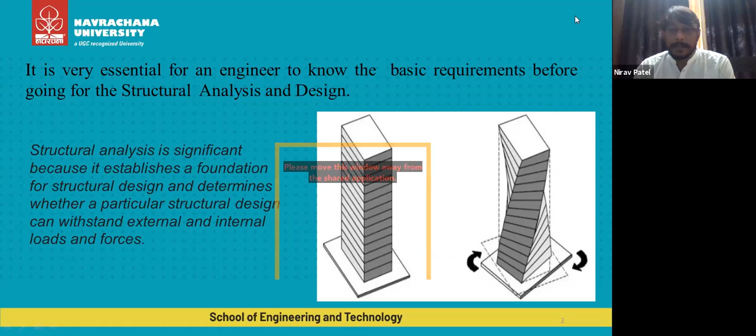Here on the screen, you can see a simple figure of a building showing the twisting due to unbalanced forces and how it is going to behave. Just a schematic diagram is being shown.

So ultimately, what do we mean by analysis? The behavior of a structure is going to function according to the design period for its intended use. It's not that we think upon any specific building for a specific period only - each building has a specific design period, different purpose, and different materials, which we'll see later. But we have to analyze that particular building for that particular behavior.

All structures are ultimately assumed to be linearly elastic, and based on that we calculate whether internal forces are produced due to the design loads. We can also say that material strength is always assumed - we predict the strength of a material, say steel or concrete, and those strengths are predicted and characteristics determined based on that, and then we proceed to the design part.

We've heard of the words bending moment, shear force, deformation, torsion, deflection. All of these are ultimately computed so we can analyze the particular building, and based on these values - which are our analysis values - we design according to the loads and governing forces.

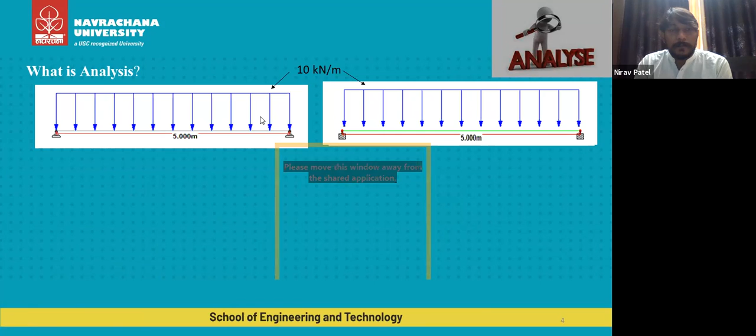Here a brief example is given which most people might already know, just to brush up. A simply supported beam is shown, having both supports as hinges. A 5 meter span is taken with a UDL of 10 kilonewton per meter. The first beam shown is a hinge beam, and here this is a fixed beam. So for the same span and same loading, what changes can we see?

This can obviously be calculated manually, but I've taken a screenshot from STAAD itself. The maximum deformation in case of a hinge beam with simply supported condition is 2.133, while in case of a fixed beam with the same span and loading, it reduces drastically to 0.417 - almost 5 times. We've heard that when the support changes from simply supported to fixed, we can reduce the deformation up to 5 times.

If I focus on the bending moment parameters, here the maximum bending moment produced due to the simply supported beam - we all know the equation WL square by 8 - gives a value of 31.25. The same thing in a fixed beam is distributed to a fixed moment as well as the simply supported moment at center, coming to 20 and 10 respectively, which reduces to one third the extent of reinforcement ultimately provided at the center.

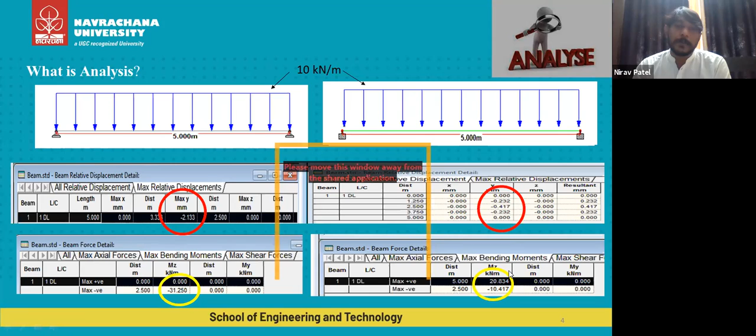So all of this is analysis. Now what is design ultimately? We're going to talk about analysis, so why should we focus on design? Design is a parallel thing which should be known while analyzing the structure - we should know both parameters. Only one is not going to help out on its own.

So when we want to fix a section size - say for example a concrete section - whether it is 250 by 400 mm beam, or 200 by 400 or 500 mm.

What section size I should take is again going to be determined by the characteristic strength of the material, whether I'm going for M25 grade of concrete or M20 grade. The whole beam size is going to change accordingly.

We want ultimately the beam, column, or any structural element to sustain the bending moment, shear force, torsion, as well as deflection, which is analyzed due to the design loads we assume while designing the whole building. As the code has given permissible limits, we have to check them within those permissible limits.

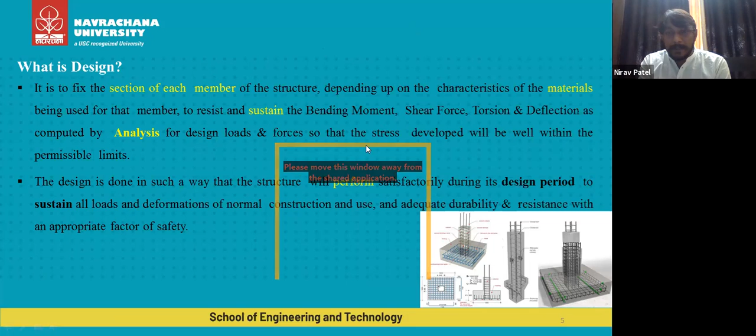The design period of any particular structure is to be done till a certain point, and it has to sustain all the loads and deformation under normal conditions. Normal conditions means whatever we have assumed while designing, and that same thing should be done parallelly throughout the lifespan of that structure. Say if I'm designing a beam for 10 years, that same thing should be done parallelly.

The basic requirements for structural analysis: it should be designed according to the type of structure, the purpose of use, and accordingly we have to analyze the particular structure. Whether the building is residential or commercial, whether it is a road of flexible or rigid pavement, whether it is a bridge of minor or major category, whether residential, commercial, educational, industrial, or tall buildings.

You might be thinking, what is the purpose, how does it influence analysis? The purpose or use of the structure is important in analysis, because we have to take a parameter based on the use of the building also. That we are going to discuss further on.

The materials to be used for the structure are steel, wood, fibre, plastic. Any members or materials can be used, and it is to be accordingly modeled or analyzed for our particular structure. Then an important parameter is the location of the structure, where it is there.

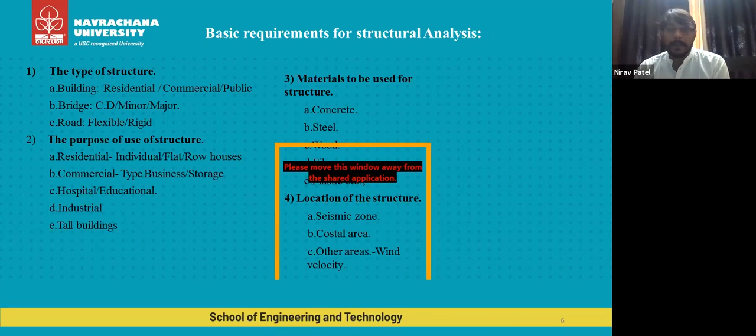The seismic zone, as we all know, depends on which country and region we lie in, and it is going to affect how we analyze the building. Not only seismic zone but coastal area, the wind parameter, wind velocity adjusting to the building, and the height of the building - all these parameters are to be considered.

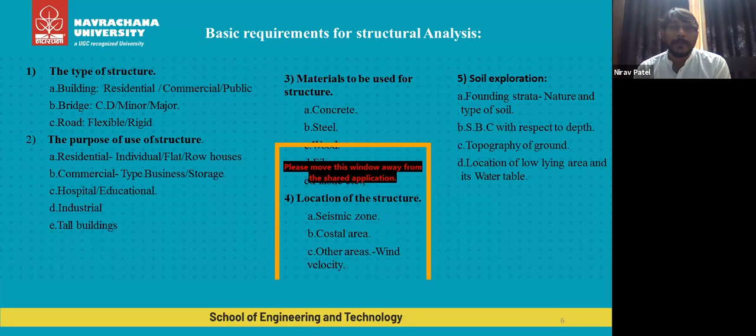Soil explorations are also important, which has already been discussed. Yesterday we had a very nice presentation on soil importance and its uses, how SBC is important, and whether it is lying on a low lying area, whether the water table is impacting it or not. These parameters also are to be considered while analyzing any structure.

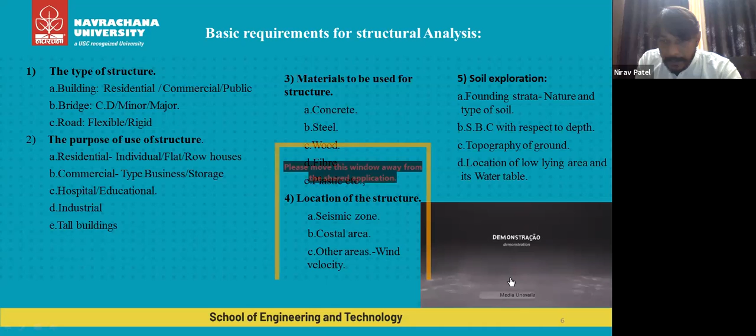Here I have a very short video to be shown. It is focusing on structural connections, and how connections are important and what they govern. Please excuse me for a minute, I'll just play the video. I guess it's not playing here.

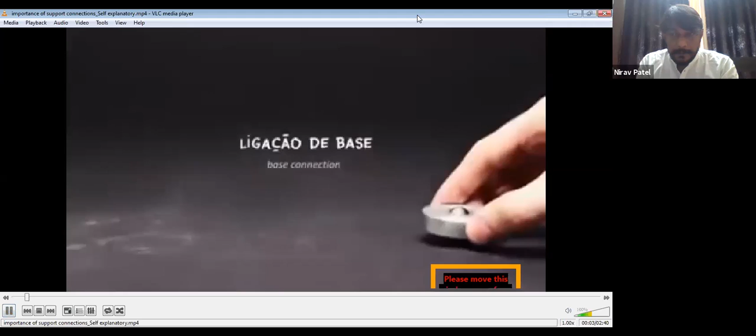I hope the screen is visible. Yes, yeah, I'll just play the video, just a bit. Probably many of you have seen this video, but still for a regular glimpse of how it impacts, a very visual thing is being shown to us.

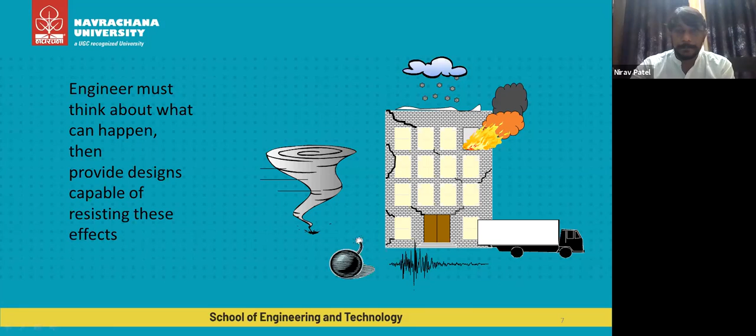Pertaining to wind loads, a very famous example from 1889 which is still standing is the Eiffel Tower, which we know is 300 meters tall, designed and analyzed by Gustave Eiffel in such a great manner that it is still withstanding all the forces, even though there were no softwares available through which we could analyze at that time.

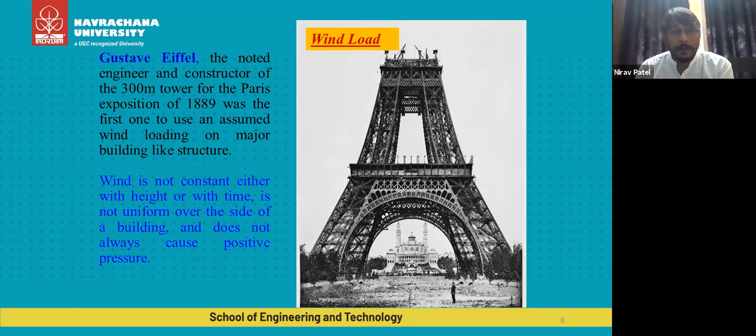As we know, wind is not constant with height nor is it constant with time. Right now there may be very less wind, and after some time there may be high intensity wind flowing at 40-50 meters per second, and so on. Also, it is possible that on one side, the windward side, it creates high pressure, and on the other side it creates low pressure. So that was also to be considered during these points.

The second important parameter which I feel is important is the seismic load. Now for the seismic load, if we see, pertaining to our own country, these are the zones highlighted, and we can see majority of the land. The percentage has been calculated, and it is almost 60% of land under moderate to severe seismic hazard.

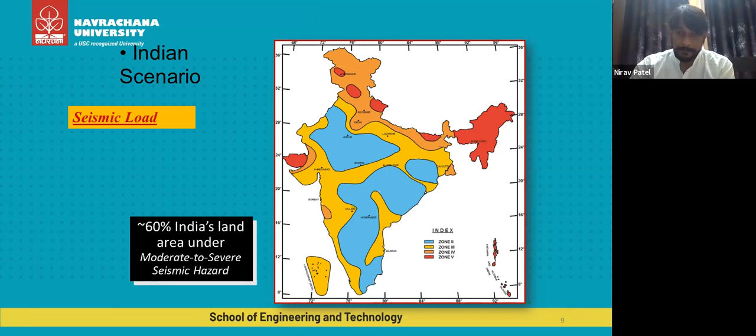If you look at the four major cities, Delhi, Mumbai, Kolkata and Chennai, they lie either in zone 4 or zone 3. The major cities are listed: Patna, Darjeeling, Amritsar, Ahmedabad, Surat, and our own cities in Gujarat - Gandhinagar, Rajkot, Surat, Vadodara - all are in zone 3, so they are more critical.

Bhuj, as everybody knows, is in zone 5. So that is one of the major segments where we are usually worried about what is going to happen to our nearby cities due to Bhuj.

Now we are going to directly focus on earthquake as a parameter, and why we are going to talk about it, because whatever structure of any height we consider, earthquake has to be considered for that building, whether it is a 4-story or 5-story building. Nowadays we must mandatorily consider that earthquake force and analyze a particular building. To be very precise, even if I design a single story building, I still have to consider where it is located and how it is going to impact due to the natural hazards.

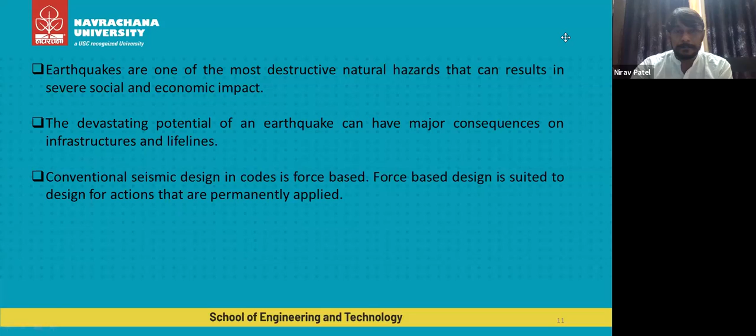The conventional design code which we usually refer to, IS 1893, is a force-based design code. Now, force-based design is suited to design things which are permanently applied to a particular structure. There are two types of methods we can deal with: force-based method and performance-based method. The force-based method is the one which usually governs us, and we design our buildings according to that.

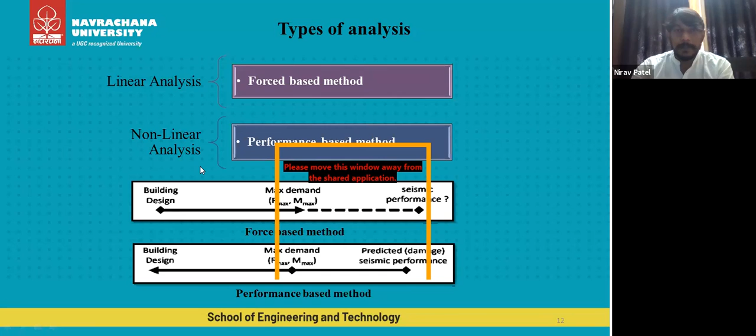Second is the linear but dynamic analysis, that is response spectrum analysis. Then moving on to non-linear cases, the first is non-linear static analysis, that is pushover analysis, and non-linear dynamic analysis, which is time history analysis. Now when we go for different types of analysis, how it is to be considered, we'll see briefly, and then move on to one particular method in depth.

Firstly, for time history analysis, how it is governed - the name itself says time history analysis. We have to analyze any particular building, any particular model, any particular structure based on the historical data which we are having, which is based on time.

We have to take a particular earthquake data which is already existing. Say for example, I want to analyze my particular building which I am designing right now to resist the earthquake which had come in Bhuj, so I will take that time history. If I want to analyze my building up to the extent that it can withstand the Kobe earthquake of so and so intensity, we take that data which is already available from the past. That's why the name is time history analysis.

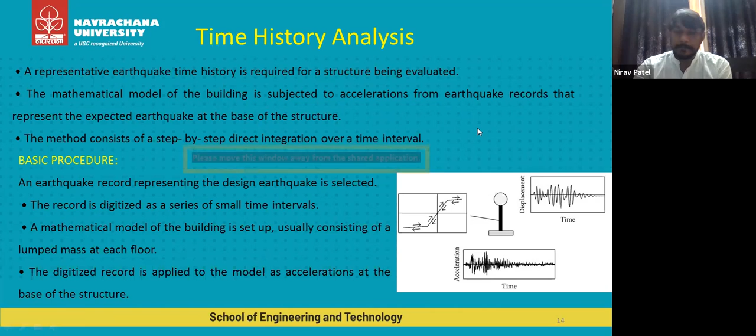Now comes the equivalent static method, which is a very interesting case, I would say, because in the majority of cases we deal with this - whether we want to even go for a hand calculation, this is the method which is used.

Importance factor - whether our building is a residential building, commercial building, or a public building like a hospital building, importance should be given. So that role plays over here, that the importance factor of that particular building should be 1 or 1.5. We all know that our building during an earthquake is going to be subjected to some or other harm, but we do not want public buildings, hospitals, or fire brigade stations to get damaged at any point in time, because they are the sources where casualties are going to be taken, or they are the buildings from where we can save other structures.

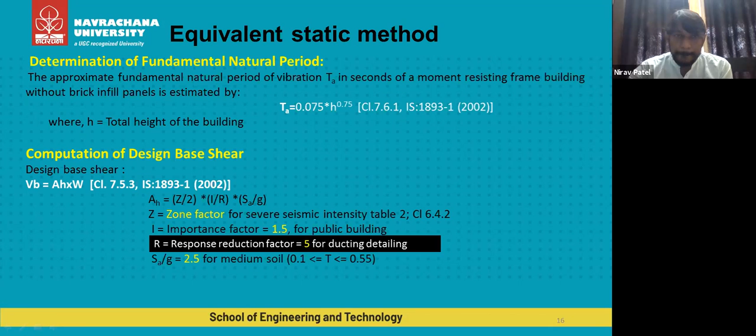Now, how is that particular factor decided, or how the code is giving that particular factor? That we are going to discuss today. So firstly, before discussing the breakout of the R value, we'll see what other codal provisions are taking for the value of R. We have said that Indian code takes 3 or 5. What do other countries take? Let's have a glimpse of that.

So if you compare with Europe, Japan, and Mexico, the R factor is based on the time period. When we have a time period of 0.1 seconds, it is taken as 2.3, 3.3, and 2.5 respectively for the respective countries. And when the time period increases, the R factor also increases to 5, 4, and 4. So this is being governed by these countries. Looking further...

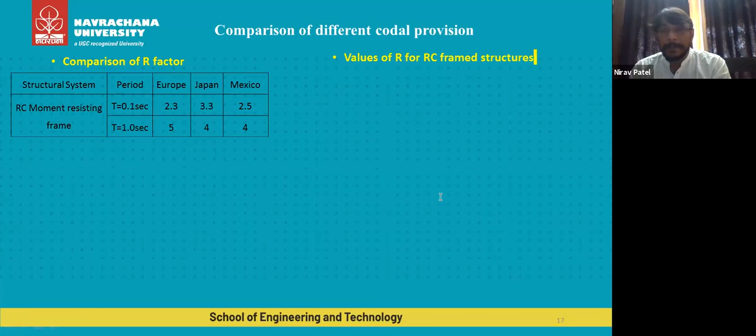I don't know why that is not being displayed. Okay, just for a minute, we'll see from this slide itself that the ductility factor which other codes are governing, that is ASCE 7, is also giving a variation of 3, 5, and 8 depending on the dissipation energy - how it is going to dissipate, whether it is low dissipating, medium dissipating, or high dissipating. So based on that, the code is analyzing the structures.

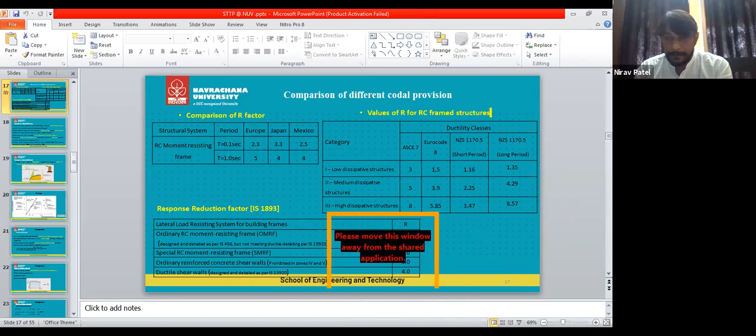Now, as we have seen, according to the Indian code it is clearly visible that Z, I, SA by G is based on the seismic hazard estimation. Wherever your building is, suppose it is in Vadodara city, we have to take the value of Z as the third zone. Whether your building is of normal importance, a residential building, you have to take I as 1.0. SA by G value we have to take according to the time period. So there is no other factor which is focusing on the structural aspect of the particular building.

So the R value is going to be included in our design, and that's why we divide by the factor R and reduce to that extent, because we want to dissipate the energy through inelastic behavior. So the R factor ultimately acts as a linkage between the elastic level and the design level, and it also provides a link between the linear and non-linear behavior.

So we all know the behavior of any particular building according to the material which we are selecting, whether it is structural steel or reinforced concrete. The R value works according to that. So it is also an essential tool where inelastic behavior plays a role when an earthquake happens. So we are going to reduce our force to that extent so we can allow our building to perform well during such cases.

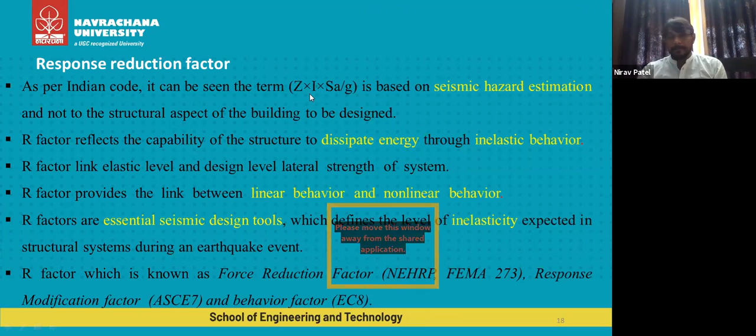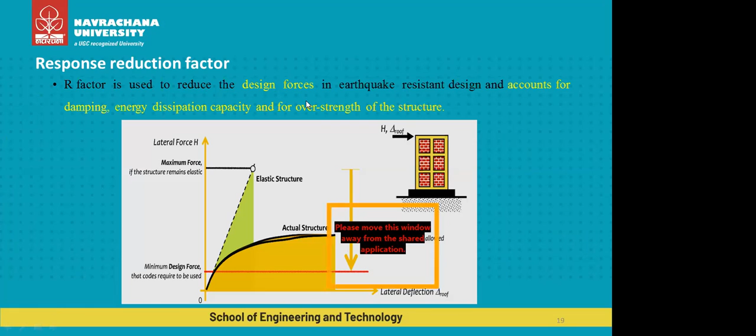So what does it ultimately do? It reduces the design force to an overstrength factor. When we design according to seismic codes, it is going to reduce to that extent, and account for damping, energy dissipation, and overstrength factor. These terminologies are very important, and based on that it gives the value. But the breakup is not given in the Indian code, they have directly given us the values.

Here a pictorial view is shown, with lateral forces and lateral displacement. So what happens due to earthquake? We know a building is going to move and laterally displace. So here we can see the elastic behavior of the structure, which converges from elastic to non-elastic, or we can say this is the actual response of the structure. We have to design the force according to it and reduce it, so the building should not reach up to this level, but should be reduced to this level. That's why we are reducing that factor. There's another view also, which I'll show.

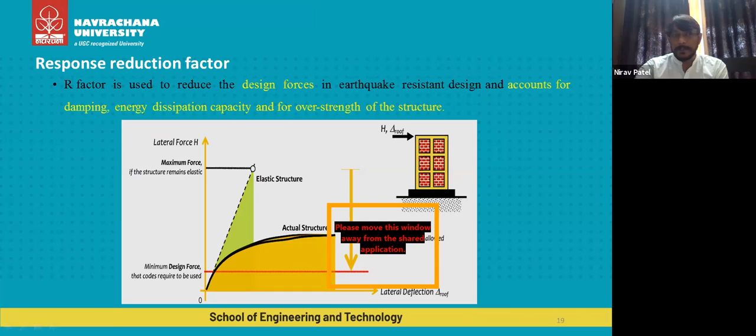So these are the terminologies I was sharing with you. The maximum force, if you see, overstrength factor, whether we call it redundancy factor or ductility factor, these are the three major factors based on which our R value is divided. So R is the multiplication, or the product, of all these three factors: the ductility factor, redundancy factor, and overstrength factor. We are going to see each of them one by one simultaneously.

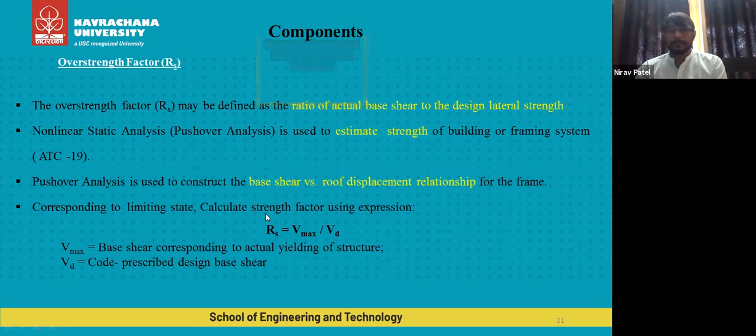Second factor is the ductility reduction factor, denoted by R mu, which is the ratio of the maximum deformation to the yielding deformation. The first parameter was mainly focusing on the base shear. Now, the second parameter is focusing on the yielding of any building, and based on that, the factor can be determined.

Now, there is no code which prescribes this particular parameter. So according to the research available, two major researchers have given the values or equations to find out the ductility reduction factor: Newmark and Hall, two authors who have combinedly worked extensively in this area, and Miranda and Bertero, two researchers who have also worked and found out these equations.

So ultimately, from the pictorial view, ductility in normal sense is the maximum ratio we get upon the yielding ratio we get. That is the ductility of that particular member, structure, or element - how much maximum it can yield, how much maximum it can deform, and where the linear to non-linear stage starts.

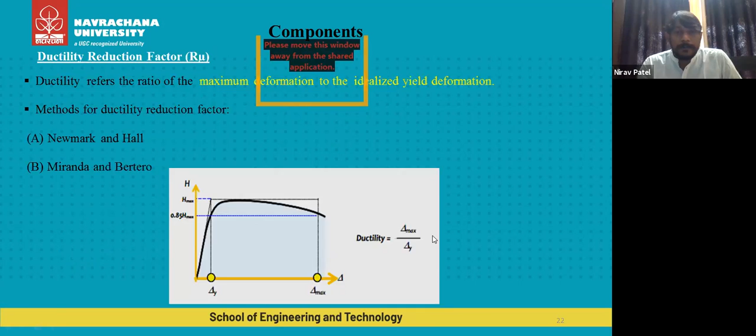So we have already seen how mu is calculated - this ductility is ultimately your mu, delta ultimate upon delta yielding, which we have already seen through the graph. This equation is given in ATC 19. Based on that, mu is calculated, and based on mu, R mu is computed. This equation is given by Newmark and Hall.

Second parameter focused on is by Miranda and Bertero. What they say is after almost a decade later, say 10 to 12 years back, they started developing equations based on soil values also, wanting to impact on that. So based on that they found out these equations, that R mu will be based on mu minus 1 upon phi, where phi is a factor which considers time period, ductility factor, and also the logarithm value of your time period.

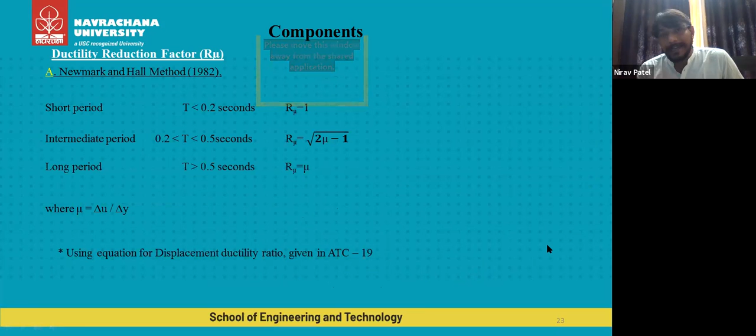Here, only one factor clearly states that when my time period is between, say for example, 0.2 to 0.5, I have to consider this particular equation - whether it is 0.2 or 0.5, I take the same value. But for an intermediate zone, whether it is 0.21 or 0.49, it would have a drastic change. So that lag was found out by these two researchers, and they have found out these equations.

Ultimately, the purpose is the same: to find out the ductility reduction factor.

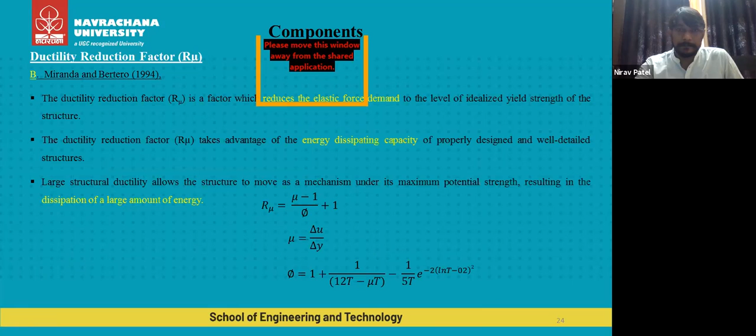The third factor is the redundancy factor. The redundancy factor is purely based on the structural system, how we are making that particular system. For example, whether it is a 2 bay frame, 3 bay frame, 4 bay frame, how many number of columns you are having in one line, in one orientation. Based on that, directly this value can be computed.

So for a non-redundant system, the failure would be equivalent to failure of the whole entire system. Say for example, if I only take a normal 2 bay frame and an earthquake happens, the redundancy factor is going to be a lesser value. When it is having more number of columns arranged, it provides stability, and that's why the redundancy is going to increase.

As provided in ATC 19, when the number of vertical lines of seismic framing, what I call bay, are 2 bays, you take the value as 0.71. When it is 3 bay, take it as 0.86, and 4 or more than 4, directly we take the value of 1. So when we have frames with 4 or more bay lines supporting the seismic frames, we go directly for one value. When it is a lesser value, it impacts the R factor, reducing that factor and ultimately increasing the capacity of our building to that extent.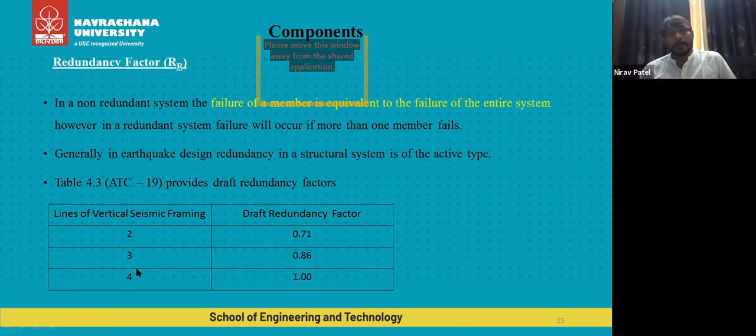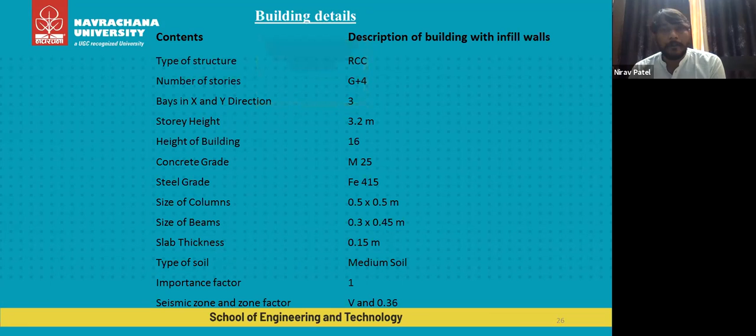Let's take an example to understand how effective it is to consider this, whether the code is giving us correct guidance. A very brief example is taken to understand the importance of the R factor, whether we should take the value directly or incorporate it, and on what basis it should be decided.

Only one example is shown here, a G+4 building, with only one story considered. This analysis can be extended to number of stories also, you can vary the number of stories. The soil type here is considered medium, we can change the soil type and conduct the same study. So even fixing the parameters, is it really impacting? Let's check that. Varying the parameter obviously is going to impact.

The importance factor considered is one. The concrete grade, as in RCC structure, is M25, which is usual nowadays. Fe415 is the grade of steel. Story height is 3.2, and the importance factor, as it's a general commercial building, we take as 1. The seismic zone is zone 5, focusing on the worst case, and the zone factor is considered accordingly as 0.36.

This frame is considered, for example, we have taken 3 bay. The frame's base size is taken as the same, 5 meters, and the height as 3.2, as explained to you.

Now the building model is analyzed using SAP as a tool for better, faster analysis, and we have considered 5 cases. Governing for only one case, I thought that would it help or not, so for that, 4 more cases are taken. The parameter, along with the video shared with you, had the connection as an important parameter, plus bracing was an important parameter.

Whenever we analyze any building, the main area to focus on is analysis. How we should analyze that building when considering all the loads is a very important parameter, and based on that the significance is decided. So we are going to signify not only the importance of the R factor but the importance of analyzing a building in that particular model.

Now analyzing the building means what? Any building we usually analyze in software, whether SAP, ETABS, StaadPro, or others - we draw the frame, analyze it, give the dead load and live loads accordingly, and place the wall loads as a UDL on the wall. Obviously the loading part is perfectly analyzed, and there's no harm in giving that loading, because that wall is actually going to be there on the building.

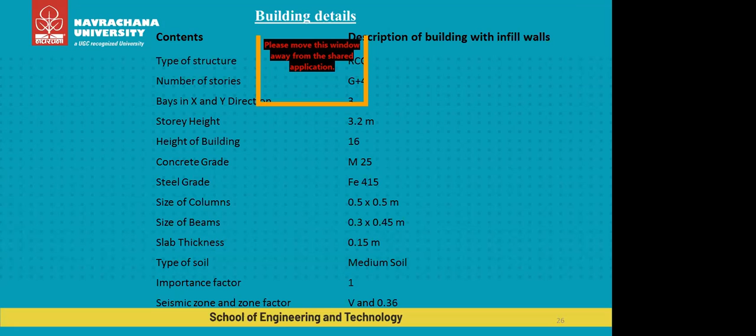If I have a G+5 building, and parking at the ground floor, with first floor, second floor as normal floors, what is going to happen? Usually, which floor fails first? If anybody could draw out the attention... Don't know, sir, which one? Okay, you don't know. So if you see the photographs of any structure which has failed during an earthquake, you will usually find the ground story, the parking story columns failing, and so the whole building collapses.

Correct or not? Yes, it will collapse from the base. So that base is a weak story. We usually technically call it a weak story.

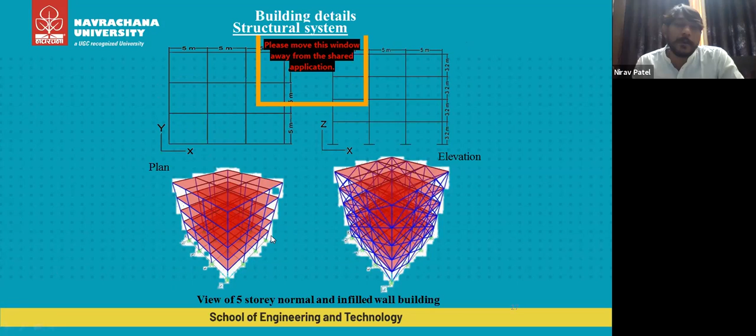Why is it a weak story? Because in the building frames we are considering, everywhere we have a wall, but this ground story is not supporting any masonry wall which the other floors usually support. Due to this behavior, all other floors have more strength, and this one is the weak one. That's why we technically call it a weak story, and due to that it fails, and if this fails, logically the whole building collapses.

So that parameter is very important, whether that particular parameter is incorporated into our model or not. When you are not incorporating it and then you provide it, actually you are safer. As a designer, we need not worry if we don't consider that wall as an element and don't design for it - if we don't consider it, we are safer. But why not take the advantage during the analysis part? So that is also being focused on in this particular example.

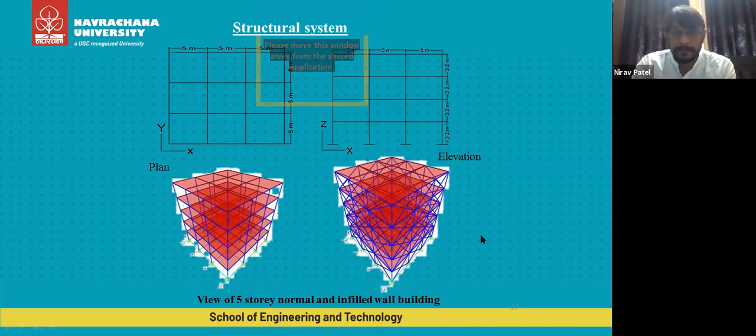Five cases have been taken with infill walls. One is going to be a bare frame - meaning I am not considering any wall element, and I'm going to run it normally without any masonry infill wall. Second, I'm going to take a building with all masonry infill walls. In another, I'm going to take infill only at the periphery. Two more models I'm going to consider as weak story cases - in one, I'll remove the infill from the lower portion, and in another, I'll remove it at the middle story. So let's understand that behavior, how it acts according to the analysis.

The design part is obviously about determining the dimensions of any particular element, whether it is beam, column, or slab. But how to analyze it, whether we should consider this or not, and if we are considering it, what are the pros and cons, we are going to see in this particular example. Over and above, we are also going to compute the R value, the R factor, which is directly given as phi in our Indian codes.

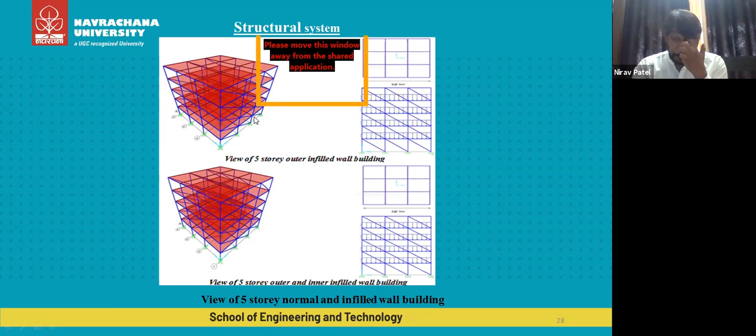Now, as I've said, the infill wall is a very important element that has to be computed and assigned to the building. To compute that, again, research has been done. It is not given in earlier versions, but in the 2016 version, it is now being incorporated. Up till now it was not there. So for the infill wall, now the equation is being given, but before that it was not there.

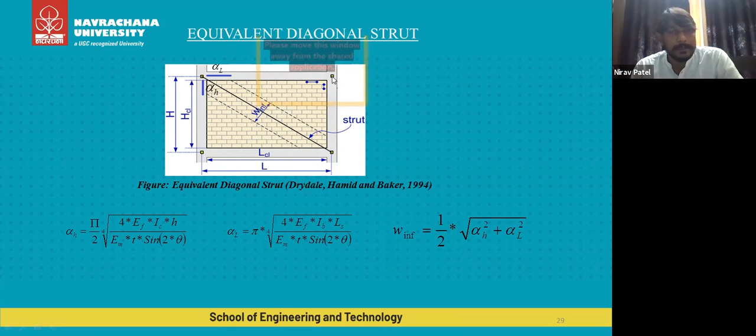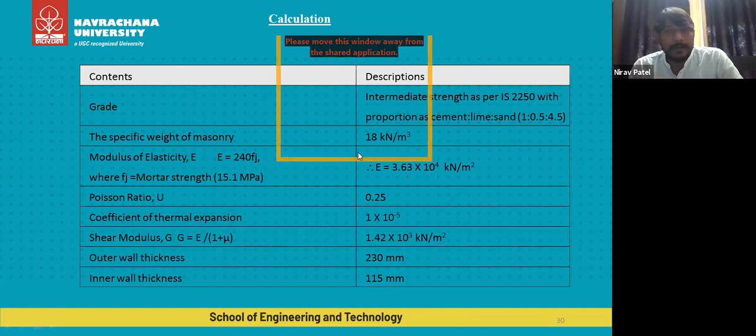So these are the components using which we can find out the width of the particular masonry strut element. The specific weight usually is considered as 18 kilonewton per meter cube. It may be considered 17 to 20, so I have taken 18.

The modulus of elasticity is given by this equation 240 Fj, where Fj is the mortar strength, since mortar is usually weaker than masonry or concrete. That is 15.1 megapascal, so the E value is computed in that sense. Poisson ratio is 0.25, and we are considering the coefficient of thermal expansion. The G value, we know this equation that G equals E upon 1 plus mu, so that also we have computed.

The outer thickness of the wall and inner thickness of the wall, which we have considered throughout the analysis, is 230 mm and 115 mm, because that is used practically. If we go on field, we see 9 inch walls, so converting 9 inches to mm, we get 230 mm.

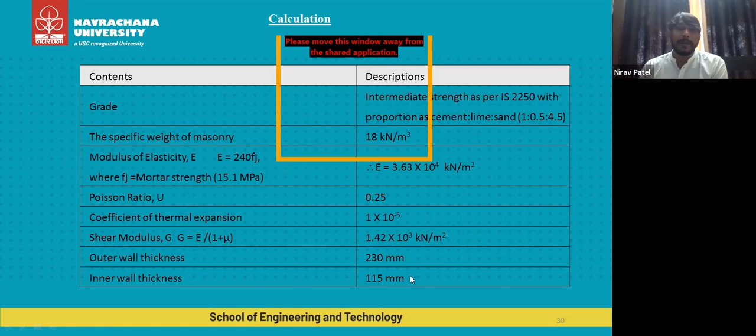The RC sections, if I precisely say the reinforced concrete sections which are governing, are taken as columns of 500 by 500 and beams of 300 by 500 mm size. The reinforcement of the column is 8 bars of 20 mm diameter, and 6 bars of 16 mm and 4 bars of 16 mm accordingly.

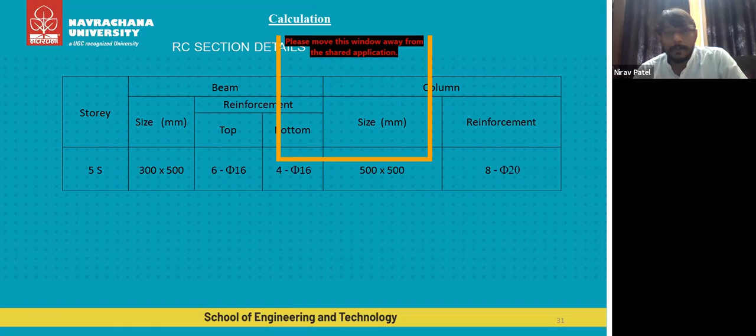Now how this size is governed, we can quickly see that the loading which we usually give on our structure, that is live load, can be considered as 3 or 4. The live load for the roofing is 1.5, floor finish we consider as 1, and the slab as 3.75 kN per meter square, considering 0.15 meter thickness.

So considering this load, firstly a preliminary size is to be governed. Even for analysis, we have to give the size of that particular element, and then we can run the analysis. It is not that this is a design part.

This is a preliminary design parameter which is required for analysis, because even while running the analysis we require how much dead load is going to come on the structure. This all is fixed, I agree with you all, that the live load is going to be there, but what is the size of the member? So what will be the member's own weight? How can we determine that particular weight?

So for determining that weight, we require the size of the member, and for that size, this is the preliminary design calculation which we have done.

So the dead load, as I said, 3.75, how it is there, that is just multiplying the density, which is 25 for RCC, getting the value. The total load is 8.75 kN per meter square. Factoring it, we get this value, and the total load is 196 kilonewton.

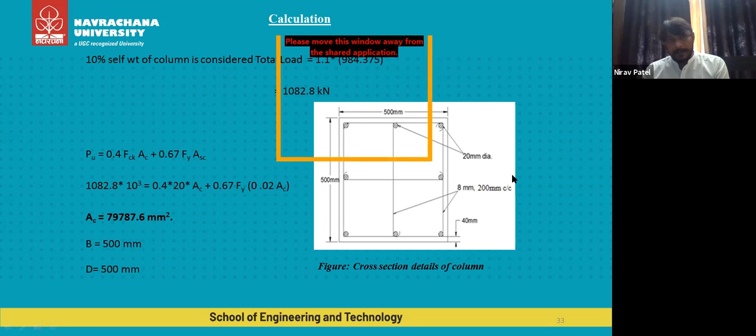I preliminarily decide the sizes based on the loading which is given to us, same way for the columns, same way for the beams. The span is there, the UDL is there, converting using the equation 0.138 FCK B D square which we all know, assuming the beam size, and then governing the size accordingly.

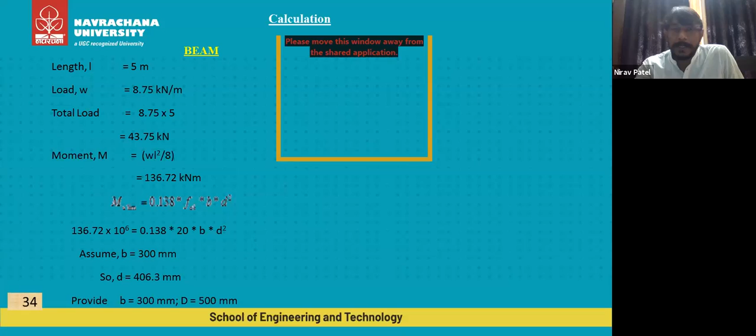So this is the procedure for how we can determine the preliminary size of the beams and columns, and how we can analyze a particular structure. Now even for finding out the base shear, we require the size of the member, so that's why everything is incorporated, and here the 5 cases which we have discussed are listed over here.

A normal building is one which is not having any walls. Second case is where infill wall is there, but only at the periphery, inner walls again are not being given any strut element. Then the third model, every wall is given as a strut.

The fourth, as we said, is weak story, and the fifth is soft story. Whenever the wall is not there on any intermediate story, that is considered as a soft story. Same way as we consider on ground floor, the parameter here is technically known as a soft story.

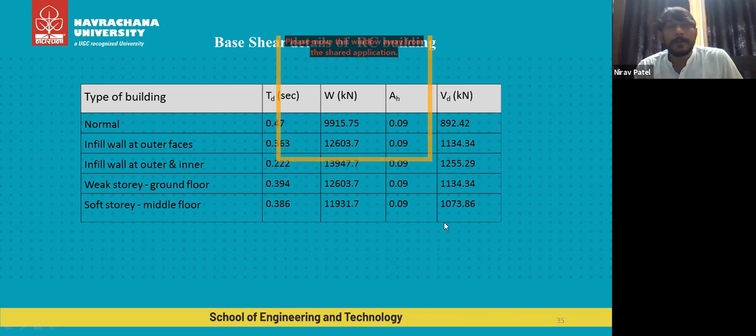The design is governing the particular elements, and based on that we are analyzing the weight of the structure, the time period, and finding out the base shear. This is the design base shear which we are getting through the equivalent static method as per the given codal provisions, that is IS 1893.

So the code part is over here. Now again we require the second base shear, which is the actual base shear. How can we get that? For that we need to run the pushover analysis.

The static pushover analysis is a relatively simpler intermediate solution to a complex problem, which is going to incorporate all the imposed load on the structure, because in pushover analysis we are going to push a particular structure up to a desired level.

Pushover analysis is a very basic and useful tool for non-linear static analysis, which is ultimately going to evaluate the limits up to which we can finally get the desired drift or the desired force in a particular segment. The analysis is going to be terminated or stopped at a target displacement.

That displacement is known to us at the starting only, and we are going to design the particular beam, or the column, or the whole structure to be precise, for that particular target displacement.

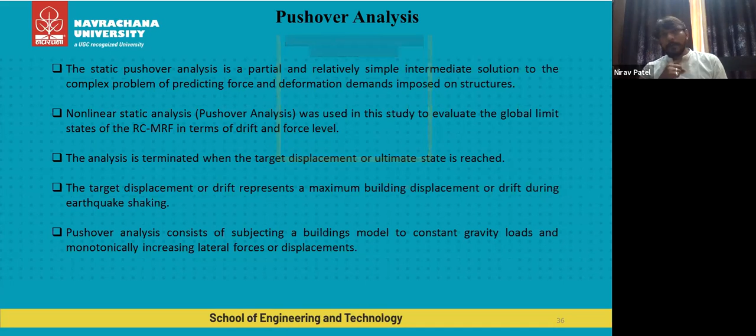What we usually do is, the loads actually acting on the building are known as gravity loads. So firstly the gravity loads are there, and then the monotonic load is going to be acting on the building in case of horizontal loads for your pushover analysis.

SAP is being used as a tool here to analyze the whole models. A brief set of screenshots are also being shared. If you want to use SAP as a tool, how you can do that, just for a ready reference I can say—I'm not going to go into the software part a lot, just a glimpse of that.

Firstly we are going to define the mass sources. The mass source is the whole building as a whole. Then we are going to define the different load cases, whether it is dead load, live load, then response spectrum load, or pushover analysis.

So we are going to determine the push, and then decide the acceleration, whether it is going to be considered into which segment, whether we are going for a linear case or a non-linear case, whether we want to include the P-delta effect or discard it. That again is a very different topic where we can undergo research and understand a lot of parameters.

Then we decide from which code we want to adopt. So we have used FEMA, and we are going to define the hinges as per the given table. We can also define as per our choice, but they are predefined as per FEMA here.

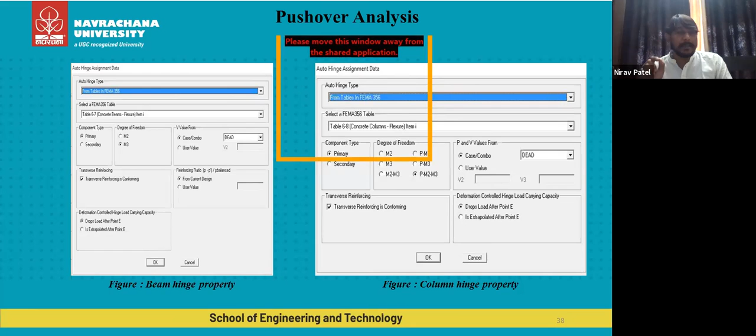So if you want to see this structure shown here, this is the beam hinges which we define, and this is the column hinges which we...

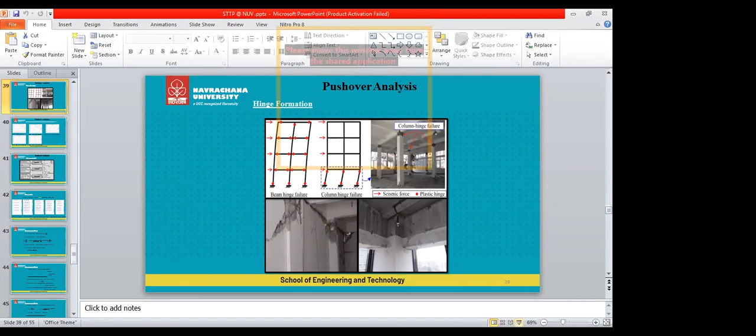I don't know, this is also harassing me today. The screen is not moving.

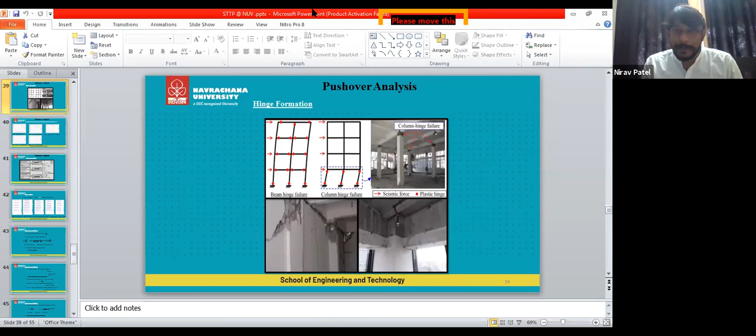We were at the point that the hinges which are there on the actual structure, if you see, these are the hinges formed due to the seismic force on the actual structure. This shows us that the column is going to fail like this, the beam is going to fail like this. These are the column failures. This is the place where usually the column fails. Here you can see, so these are the critical points where the hinge forms a pattern of failure.

So we are going to design the particular building in a manner that at the points where it is critical, we design those elements more. Now for designing those elements more, we have to analyze in that particular manner, because design and analysis are simultaneous parameters. So if I want to provide more reinforcement or more concrete section in a particular area, I have to analyze that particular segment.

Now for analysis, I have to make that a critical junction. So these junctions, here you can see the beams and here you can see the columns. These are the critical junctions where failures are predicted. So there we are predefining them as hinges.

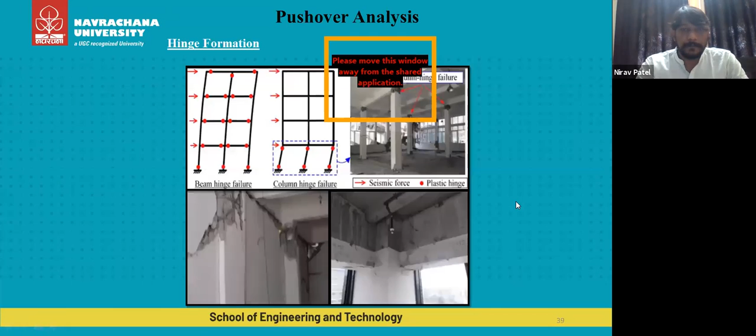After getting these pushover curves, we are going to focus on the performance point. Now the performance point is a very important point, where our building is going to perform. The technical name considers this important parameter, the point where the performance, where we as an analyzer demand, okay this is the performance point of the particular building. The meaning of the word is the usual meaning, as we use in English, the performance of this particular case, this particular student, and so on. So for the structure we are analyzing, how much is the performance of that particular building, that we are going to find out.

Now how can we find out? The performance of anything is based on two things: how much it can do, and how much we expect from it. So if I'm expecting 10 out of 10, that is my demand, that is what I'm going to expect. And how much is my capacity? I know that even I cannot score 6 marks and I'm expecting 10. So that is my capacity.

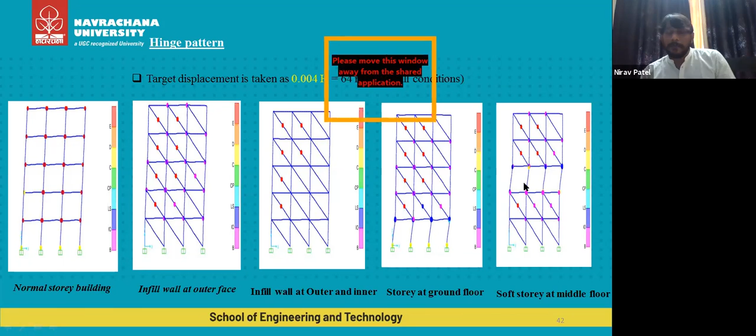This is ultimately done through the maximum deformation and the yield deformation. This yielding deformation again we are going to get from the parameter discussed over here. So the performance point gives us the yielding point. We have the yield from the pushover curve, we get the yield drift value, and this is the maximum limit available according to the code. Also, that is 0.004h, which we are giving to the structure, and that is given in the code also. But how much we are achieving is recorded as the yield point.

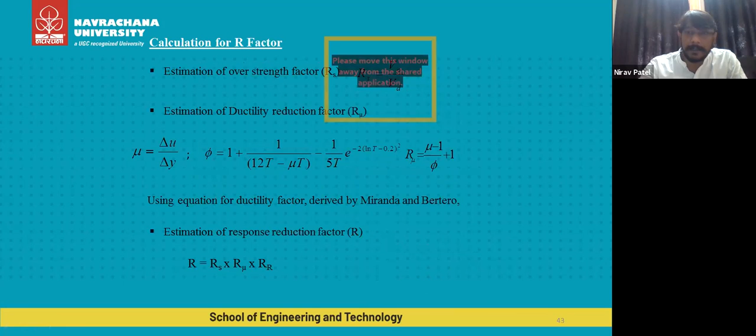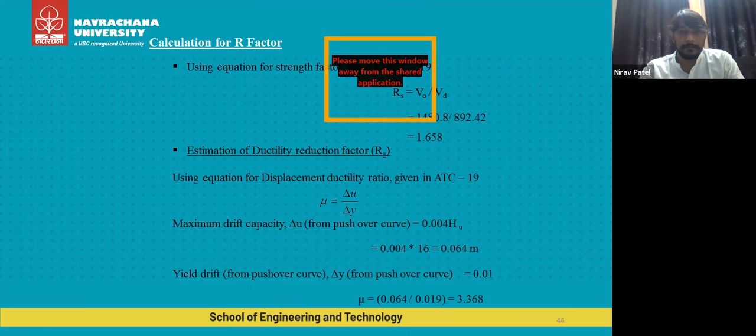So we will find out the ductility value according to it, and based on our mu and phi value, phi will be calculated using these values. The time period we have, phi we can find out, and R mu will be calculated using this equation. So here instead of using Newmark and Hall, I have used the equation of Miranda and Bertero.

Now the estimation of the response reduction factor using all as a product, and we know that RR will be 1 because we have 4 vertical lines in our seismic framing arrangement. If we had only 2 bays, the value would change, but as we had 4 bays or more, we can directly take the value as 1.

So we have found out the R value as 4.952 for a normal building without any infill wall.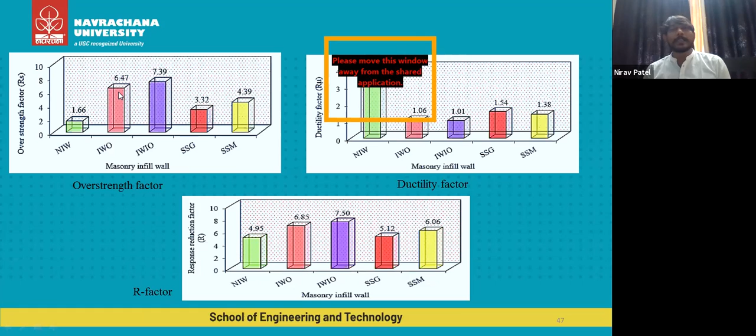But as the values of R for other cases are changing, that factor is going to change and that is going to affect a lot. So here you can see that the design base shear for the Indian code is much higher as compared to the one for the modified R value which we are calculating. So here you can see that it is reducing a lot.

For knowing, the notations are again the same, because writing the whole sentences was not convenient, so I have written notations. This is for NIW, no infill walls; infill walls at the outer ones; infill wall at inner and outer; soft story at the ground; and soft story at the middle.

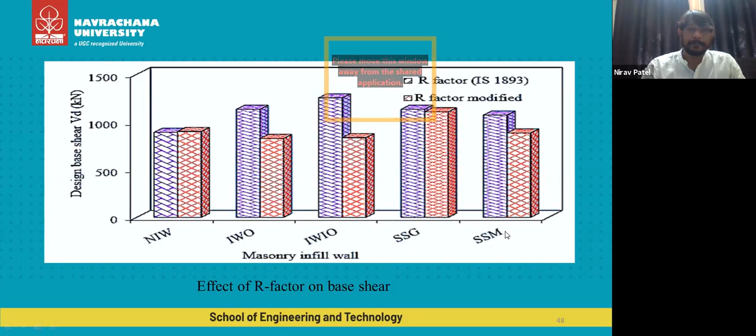Now, if I focus on the displacement part, the second important parameter for an analyzer is displacement. So if I consider the R value according to the given code, what is displayed over here, and if I incorporate the actual value found out using the equation, on the screen we can see the differences.

That is also going to reduce, the displacement is going to reduce, only as the R value is almost 4.95, nearly 5, same. For this we are having almost the same values, rest everywhere it is effective.

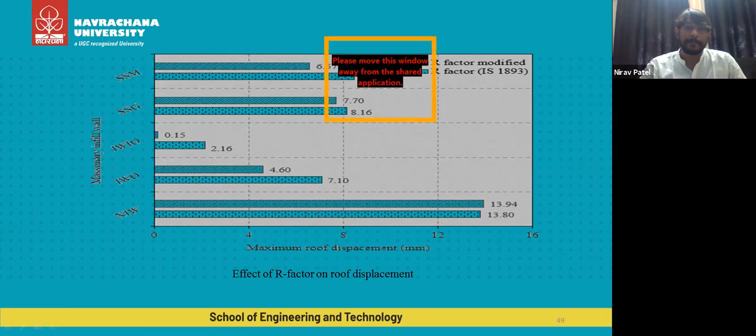IDR, which we popularly know as interstory drift ratio, is also going to change, and we are plotting that over here, seeing the values in a graphical manner. So we can say the stiffness of the building is going to increase obviously using the infill walls, and when they are used, the ductility factor has been reduced a lot.

The infill walls are going to consider the overstrength factor as it is there, and it is also going to consider the displacement which is there, and that also is going to be reduced. Here you can see the drift ratio is reducing for all the particular parameters.

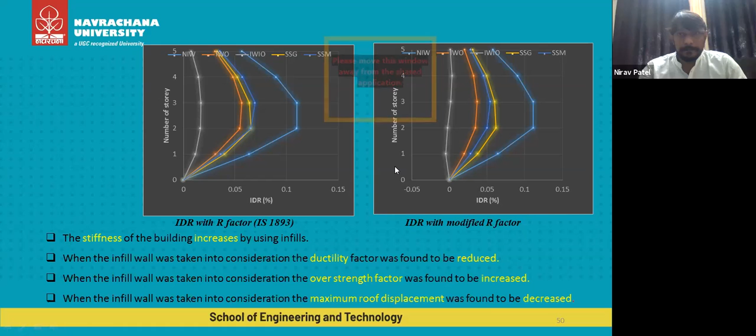Some values which are found out in percentage, comparing to the codal values. So how much increase in overstrength we have found out comparing to the building which is a normal one, which is having no infill wall. If I compare to that particular value, how much increase I'm finding in the respective models, that is being displayed over here.

So if I consider, say for example, the least one, not considering the highest one, even the least one, I can see that the overstrength is increasing, it is increasing 100%, so almost twice, four times, and so on. The ductility factor is also going to reduce in percentages, that is found out over here. The R factor also is increasing, that is listed over here.

This is not considering codal provision, the focus here is on how an analyzer works while analyzing, whether he should model that building as a strut or not. If he takes it as a strut, how much variation he can get is displayed here. At minimum he can get a 3% increase in the R value, or for overstrength, a minimum of 100% increase.

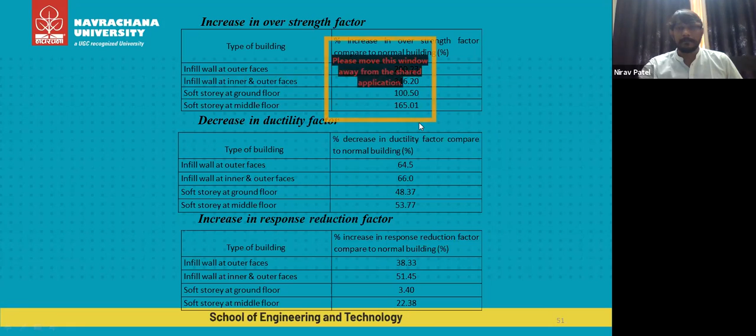Same values for roof displacement, base shear, and interstory drift ratio are displayed on the screen. Just have a view of the values so it will be more convenient, we can have a glimpse. I won't read out all the tables, so you can just have a glimpse.

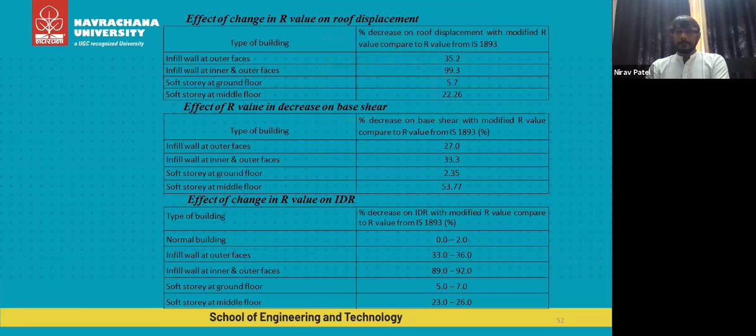Moving on further, the final summary, or the thing I would like to say is implementing only. The summary is focused primarily on the example which we have taken out. That summary is that the R value should be modeled, or modified, according to the given location.

If we see that the base shear was reducing to a drastic level, the elements are also going to be reduced, and we are going to save much economy. The ductility factor, for the models we have taken as infill wall, whether outer, inner, soft story, or middle story, was not having much variation. The more variation was there between one without infill and one with infill, so that was reducing drastically.

The infill walls increase the overstrength factor to a great extent, and reduce the ductility factor also. There is an increase in R factor for mostly all the models we have considered here.

What I would say is that when we model a given structure according to the actual value where you are designing that particular thing, it will ultimately prove to be an economical design. So every time if you model the R value and design accordingly, it will prove to be an economical design, ultimately helping the economical development of the country. So that is a very important parameter, it should be implemented in the code itself.

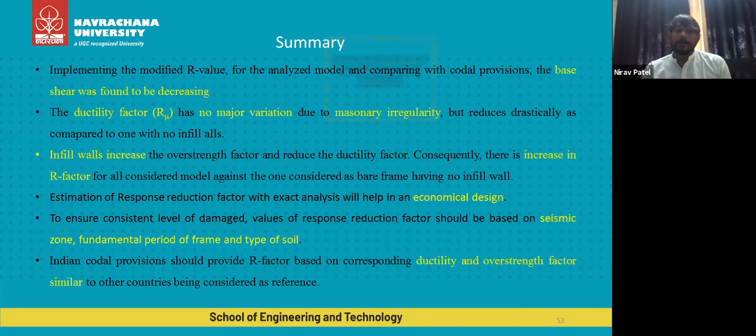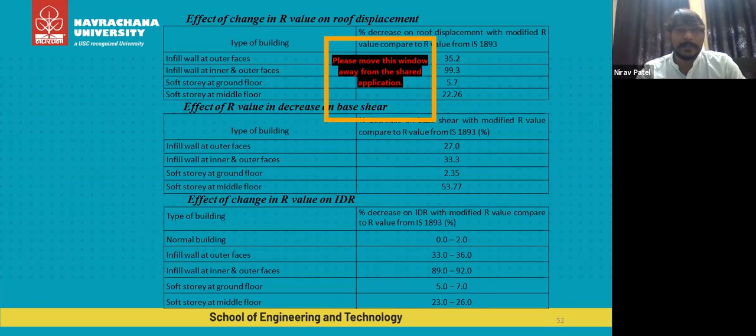A very few points I have covered in this. As an analyzer, there is much more significance to be given while analyzing any structure, what is the main concern, how it should be done. If you can't visualize it, you can't do it.

A very brief example: for bridges we are giving roller supports. That roller support is given for a specific reason, because if we don't give a roller support, as we have seen, giving fixed support is beneficial in helping deflection and bending moment. But there we are going to have lateral movement restricted, which would cause lateral displacement in the beams and bridge deck itself, and that would cause harm to the structure. So for that, rollers are provided, again showing the significance of an engineer as an analyzer.

For each and every case, we should analyze it according to the requirement. There should not be any prescribed format that if this is the case, this should be the answer. You should try to understand the concept, the importance of the structure, the purpose of the structure, why it is provided, and then apply the conditions which are more suitable to us.